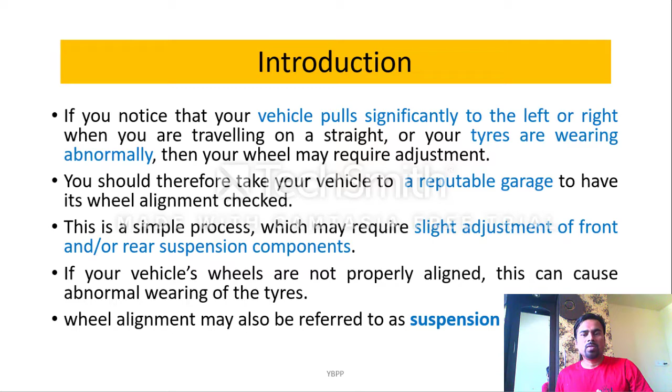Wheel alignment is a simple process which may require a simple adjustment of front or rear suspension components. If your vehicle wheels are not properly aligned, this can cause abnormal wearing of the tires or mishandling of the driving. Wheel alignment may also be referred to as suspension alignment.

Now, wheel alignment versus wheel balancing - what is the basic difference between them? People often get confused between wheel alignment and wheel balancing, but they are completely different terms.

First is wheel alignment, which consists of adjusting the angles of the wheels so that the angles are according to the specification of the vehicle manufacturer. On the other hand, wheel balancing is nothing but allowing the wheels to spin without causing unnecessary vibrations. So these are two different terms - wheel alignment and wheel balancing.

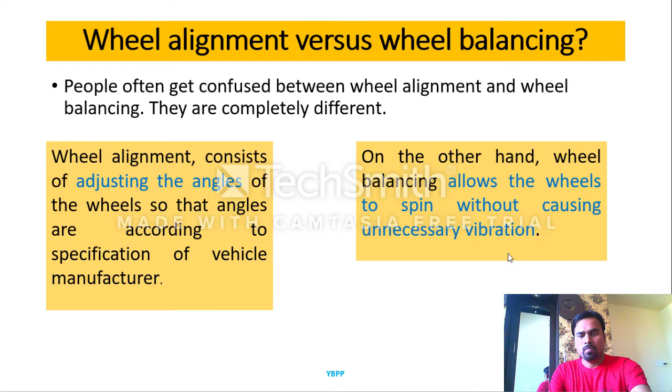So, wheel balancing - first of all, what is meant by wheel? Wheel is the combination of tire and rim. So tire and rim together is nothing but wheel.

What is wheel balancing? Balancing means there should be equal distribution of weight throughout the circumference of the tire and rim. If wheels are imbalanced, then steering wobbling occurs, it affects driving comfort, the brake will not work properly, and suspension parts may get damaged. So to avoid that, you have to perform wheel balancing.

So what is meant by wheel balancing? Tire or wheel balancing refers to compensation for any weight imbalances in the tire wheel combination, and is often performed in conjunction with wheel alignment - meaning while performing wheel alignment, you also need to perform wheel balancing. Wheel balancing corrects the weight imbalance on the tire and wheel assembly by adding some weight where there is imbalance.

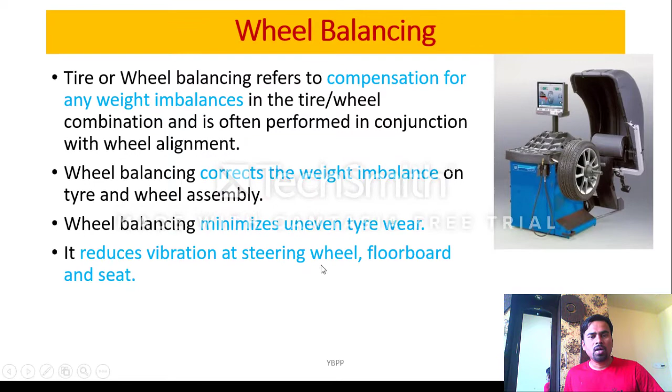Wheel balancing minimizes uneven tire wear and reduces vibration at the steering wheel, floorboard and seat. The next point is how wheel balancing is performed.

In this picture you can see a wheel balancing machine. This is the tire or wheel on which wheel balancing is to be performed, and this is a computerized display. Here is a shaft, and on this shaft the tire is mounted. So wheel balancing is performed on this wheel balancing machine.

So how is it performed? When a technician balances the wheel, they typically apply a calibrated spin balancer and test both static and dynamic aspects of the wheel, meaning the wheel should be statically and dynamically balanced.

To begin balancing your tire, a technician will mount it on the correct rim and adjust the pressure to optimal inflation. Then each tire goes on the center bore of the balancing machine. The machine spins the tire at high speed to measure the wheel-tire combination imbalance. It signals how much weight the technician should add to balance out the tire and the areas where that weight is needed - meaning the tire is mounted on this machine, and wherever balancing is needed, weight is added.

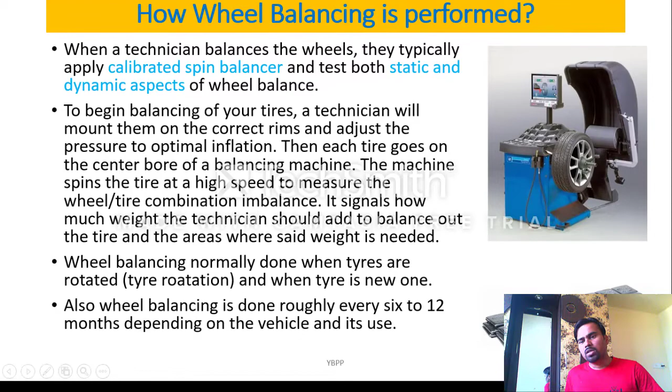In the second picture you can see the types of weights which can be attached to the wheel. In this way wheel balancing is performed on the wheel balancing machine. Now the next point is the signs that indicate the need for wheel balancing.

Signs that indicate the need for wheel balancing: first, uneven tire wear. This happens because of vehicle load distribution, road conditions, and tread wear. If uneven tire wear is there, you can go for wheel balancing.

Next point is vibration in the steering wheel at high speed. While driving, if you are feeling more vibration at high speed, then there is a need of wheel balancing.

Next point is vibration in the floorboard and seat. If the floorboard is vibrating too much and the seat is also vibrating, then there is a need of wheel balancing.

One more point: if a car is parked for an extended period of time without moving it, the tire might develop a flat spot that causes imbalance in the wheel. In that case also you can go for wheel balancing.

So this is all about wheel balancing. Prepare from the examination point of view: what is meant by wheel balancing, how it is performed, and what are the signs or indications that need the wheel balancing.

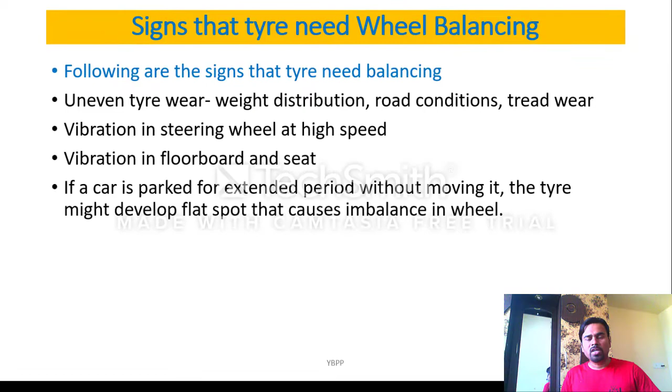So friends, up till now we have studied wheel balancing, what is meant by wheel balancing, and all these points. Now the next point is wheel alignment. In this also we are going to see what is meant by wheel alignment, how it is performed, what is its importance, and what are the signs that indicate there is a requirement or need of wheel alignment.

So, wheel alignment consists of adjusting the angles of the wheel so that they are according to the specification of the vehicle manufacturer. Every manufacturer provides particular angles to wheels. These angles are camber angle, caster angle, toe in and toe out.

Along with that, kingpin inclination and chassis height. So all these are the angles related to the vehicle wheel. Adjusting the angle is nothing but wheel alignment. Wheel alignment is very important. If you are running the vehicle without performing the wheel alignment, then there are chances of uncomfortable driving, or chances of accident. So to avoid that, you have to perform the wheel alignment.

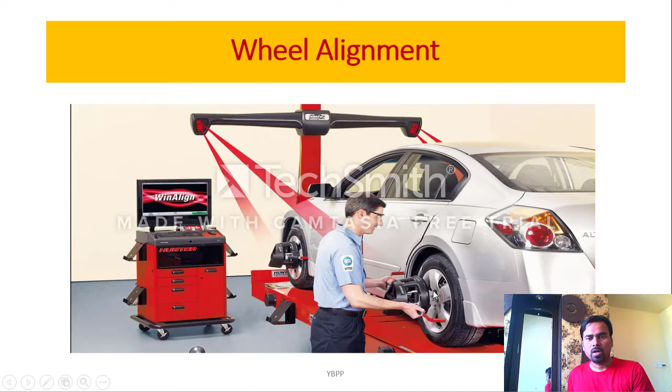So why is wheel alignment important? Wheel alignment can affect the amount of wear and tear that tires endure. Normal alignment on most vehicles is designed to minimize wear and tear and maximize driver and passenger comfort. So providing for passenger comfort, this wheel alignment is very important.

Correct four wheel alignment will reduce wear on your tires, help increase their life and performance, and improve fuel economy. It will also improve handling and driving safety by reducing steering and stability problems.

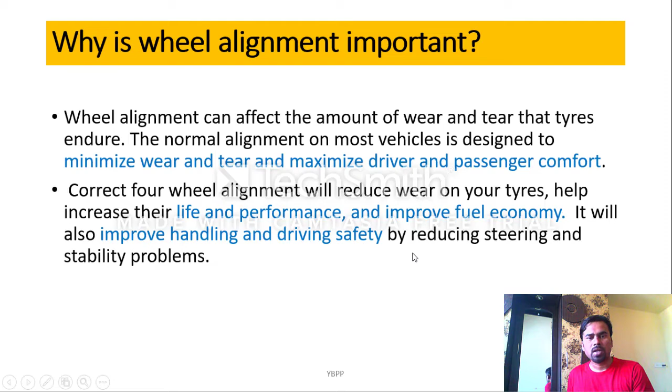Signs that your vehicle needs wheel alignment: if your vehicle has hit something or there is some accident related to your vehicle, then there is a need of wheel alignment. Second point, you notice that your tires are wearing abnormally or unevenly. In that case also you need to go for wheel alignment.

Uneven tire wear because of road conditions or vehicle load means you need to go for wheel alignment. Then you experience steering or handling problems such as steering wheel vibrations when you are driving at very high speed and the steering is vibrating.

In that case also you need to go for wheel alignment, when your vehicle pulls or drifts to one side. When vehicle is running on a straight road and we release the steering wheel, the steering will rotate on its own. Then steering wheel does not return easily after a turn, meaning after taking a turn it does not come back to its original position, so there is also a need for wheel alignment. Then steering wheel remains at an angle when driving in a straight line. When you buy a new set of tires and want them to last as long as possible, then also you need wheel alignment. When you replace suspension or steering components, in that case also you need to go for a wheel alignment.

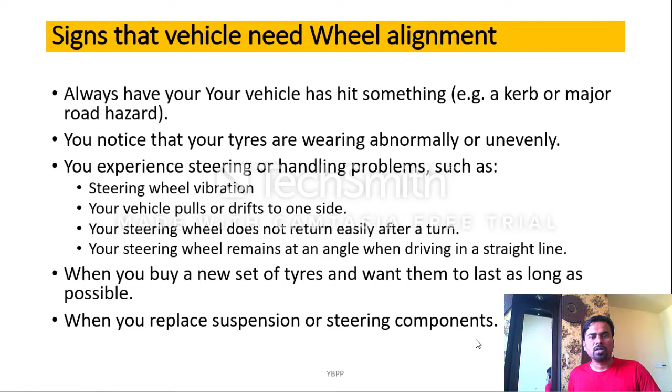Next point is effects of misalignment - if there is some misalignment in the vehicle, what are the effects? First point is risk of accident. In case of severe misalignment, vehicle emergency handling may become abrupt or unpredictable, resulting in loss of stability and control, and because of that an accident may happen.

Second point is blowout and flats. Misalignment causes tire tread to wear faster than usual due to unequal pressure on the tread. If the additional wear goes unnoticed, the resulting prematurely worn tire is more susceptible to punctures, loss of air pressure, and sudden failures - blowouts. This may mean damage to the vehicle and possibly a loss of control, and an accident may happen.

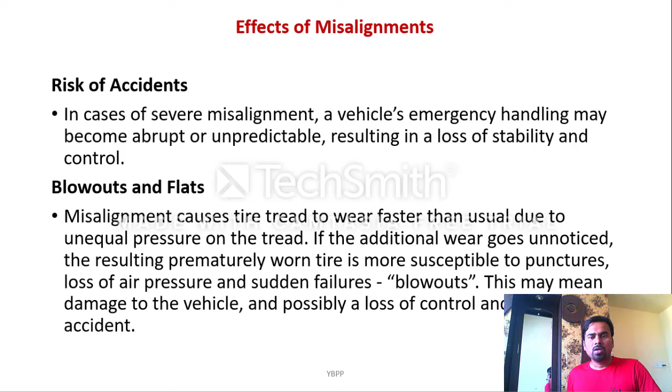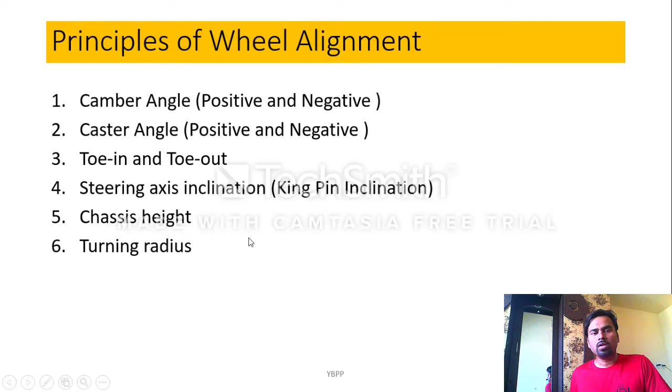Now next point is principles of wheel alignment. While performing a wheel alignment on a vehicle, the following angles are very important, and these angles are specified by the manufacturers. First angle is camber angle, second is caster angle, then toe in and toe out, then steering axis inclination, also known as kingpin inclination, then chassis height, and last is turning radius. So all these are the angles or terminology related to wheel alignment. We'll see it in detail one by one.

So first one is camber angle. Definition of camber angle: when we see the front wheels from the front side of the vehicle, the angle made by the plane of the wheel with the vertical line is known as camber angle. Now see in this diagram, these are the front wheels of the vehicle. Left side front wheel is in the first diagram, and the second diagram is also the left side front wheel. See this second diagram - this white line shows the center line passing through the tire or wheel.

This wheel is tilted somewhat outward, and this dotted line shows the line passing from the plane of the wheel. So what is meant by camber angle? The angle made by the line passing from the plane with the vertical line here - this angle is known as camber angle. The value of camber angle should be about 2 degrees. Then camber angle may be positive or negative.

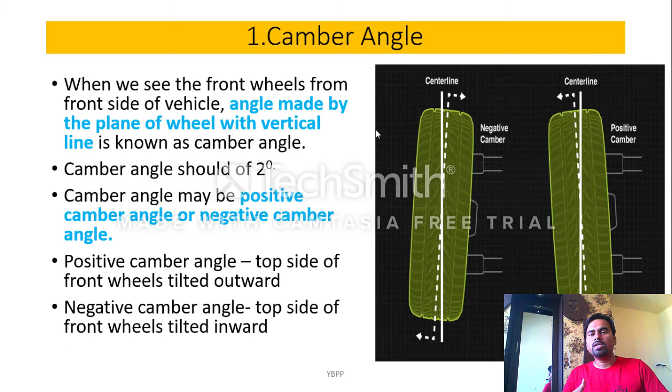Similarly, next is negative camber angle. Negative camber angle is when the top portion of the tire is tilted towards the chassis, or inward - this angle is known as negative camber angle. The line passing from the center of the wheel with the vertical line, this angle is nothing but a negative camber angle. We can see the camber angle when the observer is standing at the front side of the vehicle.

In this next diagram also you can see clearly what is meant by positive camber and negative camber. In the first diagram, here, no camber is there - the center line and the line passing from the plane are the same, so here it is zero camber. Here it is positive camber angle - the top portion of the tire is tilted outward. Here also, the top portion of the tire is tilted inward, so here it is a negative camber angle. This is all about the camber angle.

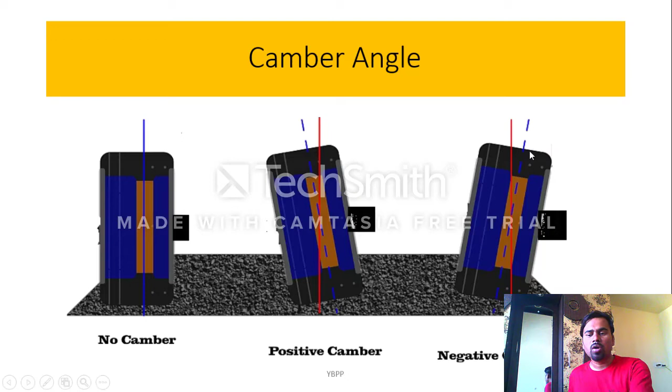Next angle is caster angle. First, we'll see its definition. When we see the vehicle from the side, meaning the observer is at the side of the vehicle and looking towards the front wheels, the angle made by the kingpin or steering axis with vertical is known as caster angle.

Now see this diagram, here it is the side view of the front wheel. This is the center line passing from the center of the wheel, and this dotted line is nothing but the axis of the kingpin. The angle made by the axis of kingpin with the center line passing from the center of the wheel is known as caster angle.

Now caster angle may be positive or negative. What is meant by positive and negative caster angle? If the kingpin inclination or steering axis inclination is towards the rear side of the vehicle, then it is positive caster angle. If the kingpin inclination is towards the front side of the wheel, then it is negative caster angle.

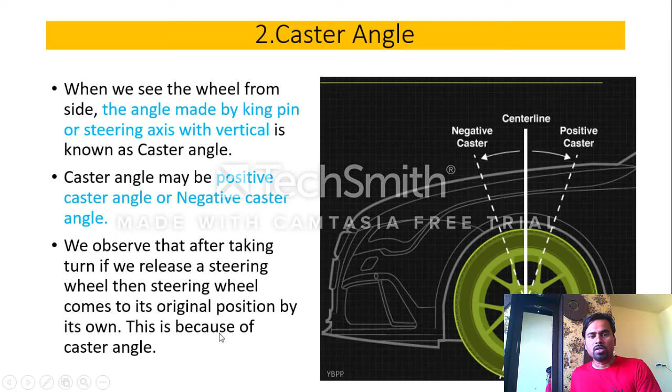In these diagrams you can see positive and negative caster angle. In the second diagram here, it is neutral caster or zero caster angle. In the first diagram you can clearly see the positive caster angle made by the kingpin axis with the vertical line, with the observer looking from the side of the vehicle. Here also is negative caster angle, where the angle made by the kingpin inclination or axis with the vertical line is known as negative caster angle. This is all about the caster angle.

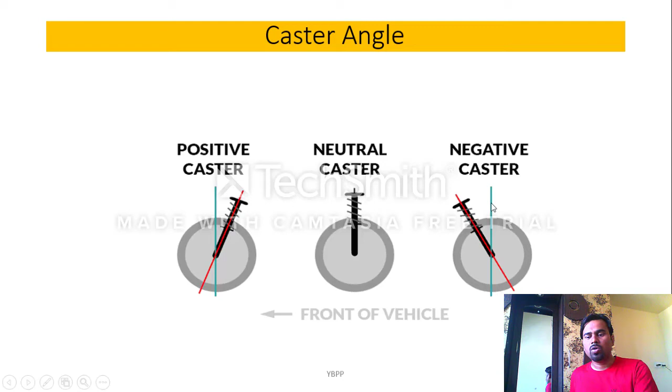Next point is toe in and toe out. When we see the front wheels from the top, we can observe these angles very clearly. First, toe in: when the front side of the front wheels are closer to each other as compared to the rear side of the front wheels, this arrangement is known as toe in.

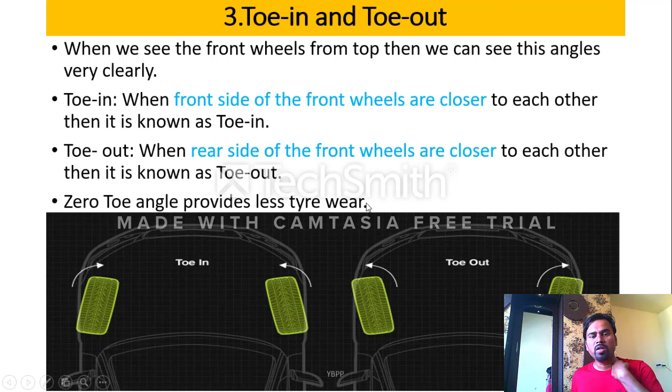Next is toe out: when the rear side of the front wheels are closer to each other, then it is known as toe out. Zero toe angle should be maintained to minimize tire wear, so this angle is also very important.

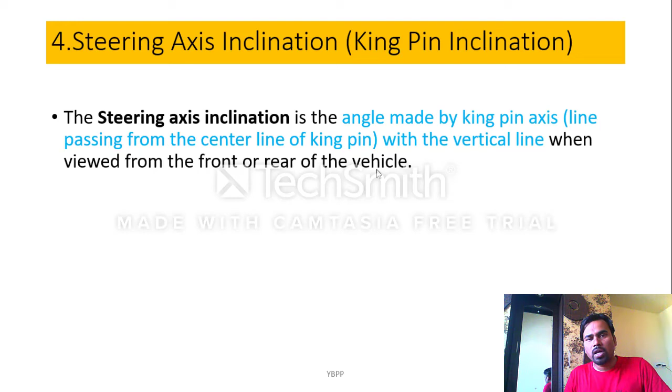Next point is chassis height, which means the height between chassis and ground. If the height of the chassis does not meet manufacturer specifications, then more tire wear and poor handling of the vehicle occurs. So it is necessary to maintain proper chassis height.

Next point is turning radius. When the vehicle takes a turn, the inner wheel experiences more tire wear, so there should be a greater turning radius for the inner wheel. This is all about wheel alignment.

Friends, wheel balancing and wheel alignment are very important points from your examination point of view. A question may ask for 4 marks in your examination, like explain the following terms: wheel balancing and wheel alignment. Or the question may be: what are the signs that indicate the need for wheel balancing or wheel alignment?

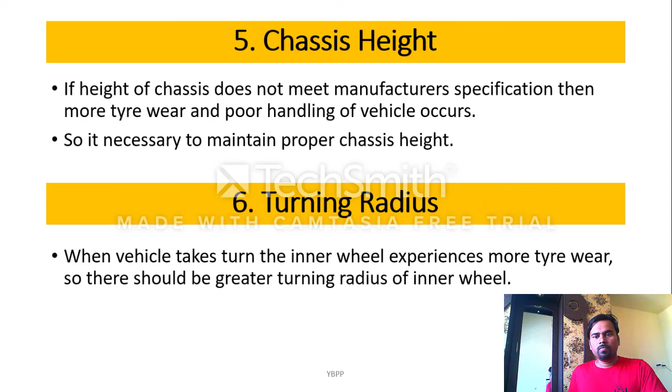Or one more question will be on steering geometry, which we have already studied. In that, these terms are very important: caster angle, camber angle, chassis height, kingpin inclination, toe in, and toe out. So all these terms are very important, prepare them well. Diagrams are also important. Thank you for watching this video.